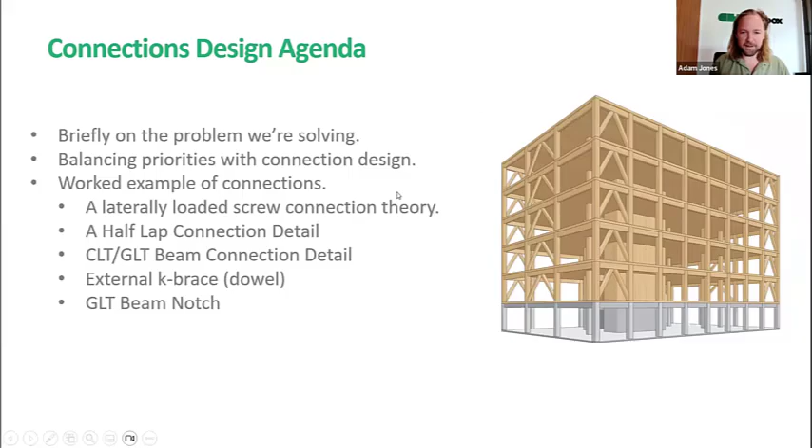So on the agenda, we're going to talk a little bit about the brief problem that we're trying to solve as an organisation, a timber engineering software company. We're going to look at the balancing of priorities when it comes to connection design, and then a worked example of specific connection details. So firstly, what are the problems that we're trying to solve at CLT Toolbox?

So when you look at status quo buildings like concrete buildings, there's a few things about it. One of them is it's easy to do, although it's sometimes less desirable. But when it comes to timber buildings, we notice that there's not as much education in undergraduate curriculums relative to concrete. There's a lot of building engineering spreadsheets and also maintaining spreadsheets. And there's a lot of going through PDF design guides and maintaining a lot of grades from the member design supply chain, but also the connections design supply chain, and also how those products interact with each other.

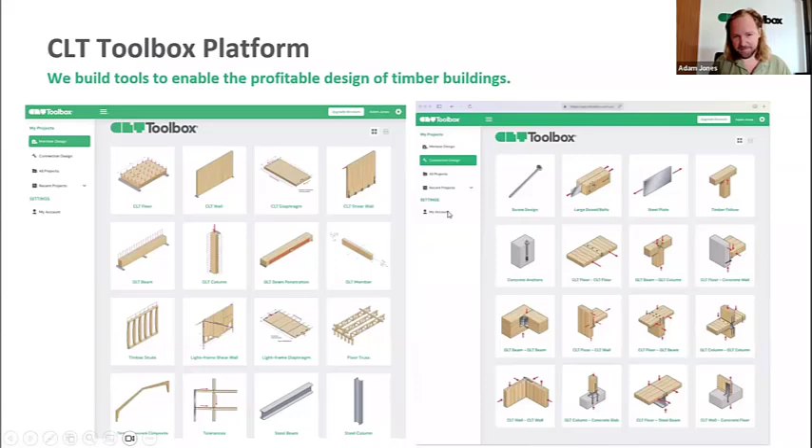So what we're looking to do is build tools to essentially make this pathway as easy as possible. And in doing so, if you make it easy for engineers, then hopefully we can support in growing the pie of timber, particularly going into new areas. So our platform, we build tools to enable profitable design of timber buildings. So anything that was previously a lot of time investment, we're hoping to make it easier and in essence, make it work. So we've got a team around the world, as Boris mentioned. We're a bit of an eclectic bunch, but we're all pretty all in on what we're doing as a team together in building this software.

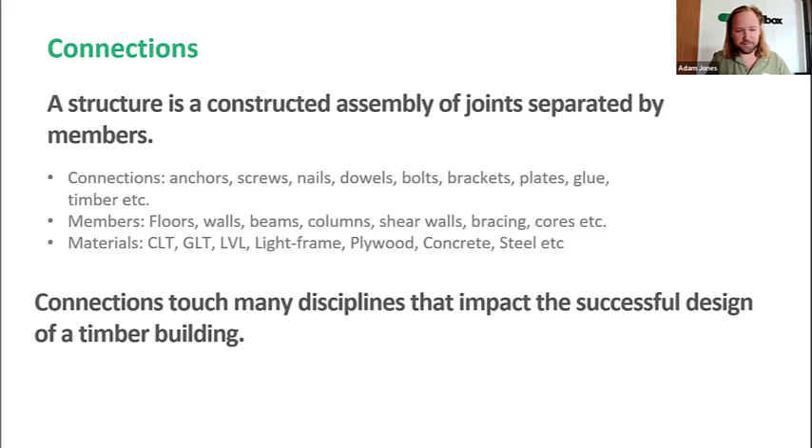The second point is connections touch many disciplines that impact the successful design of a connection for a building. So what are the things that we need to consider when designing connections successfully, not just looking at the structural design? So we're going to cover a range of multidisciplinary topics here. And the first one accounts for design for manufacture and assembly. So a bit of a plug for another Wood Solutions webinar, which is presented by Nathan Benbow, and it's Getting DFMA Right. It's an excellent webinar, but the point is, for the same connection detail for a beam column connection,

for example, there is a huge variation when it comes to CNC machining costs, because from a member supplier point of view, the CNC machine can be the bottleneck. And if you're looking at throughput at a factory, it might be, say, 100 meters cubed if there's no bottlenecks, or it might be 200, or it might be 50 meters cubed if there is bottlenecks. So that cost needs to get passed on in some way or another, and usually it's held up by the project. So with timber, we can always go as complex as we want, but we need to consciously, I guess, engineer in the complexity and know when we're doing that and adding costs.

So if this is a limiting factor of cost, how can we design with the design for manufacture in mind? And you can see some of the details, the real simple seated bearing connection, which they highlighted as basically the simplest to draw on paper, but also from a cost point of view. The second point is design for assembly.

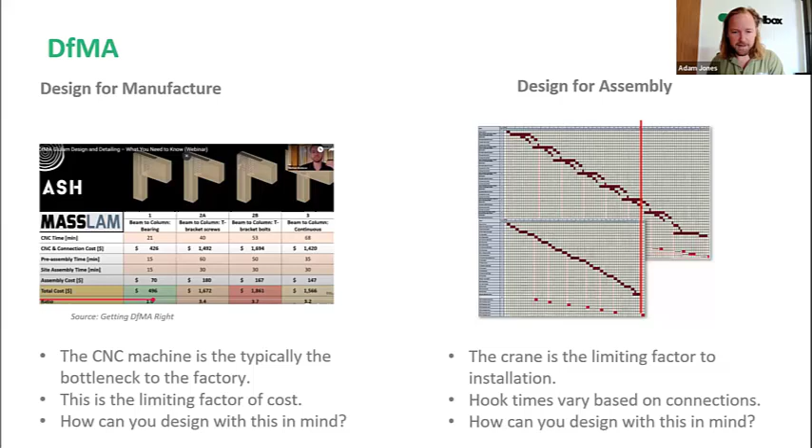So you think about if the crane is the limiting factor to our installation speeds, which enables that speed, the hook times can vary based on connections. So how can you design a really quick to install connection just to keep the crane going on to the next one? You've also got structural design.

So think about tolerances. You might have the moisture within the timber that's delivered on site. You might have rain events, things like that, to actually have swelling or shrinkage when it's in service. You might have elastic deformation, which is different parallel or perpendicular to grain. You might have deflection of the transfer structure. You got all of that happening within the timber structure.

And if you're designing with connection details that might go to a concrete core or something like that, the differences in tolerances have a big impact on the overall connections, and also, I guess, the structural safety in service. We've also got durability. Are they designed properly for external weather conditions, or are they just internal connections?

And of course, robustness. So that sometimes in a basic looking design of a building might actually govern a lot of the design to enable robustness. So what happens if you knock out one of these columns, and how does everything connect together so you don't have disproportionate collapse? You've also got different materials behave differently.

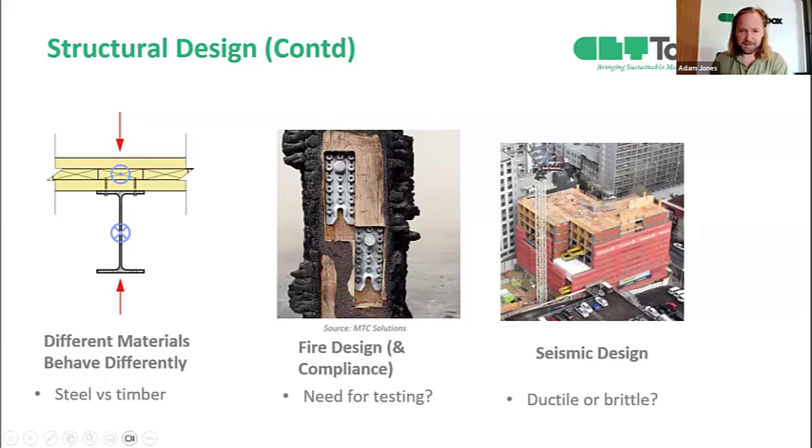Of course, you've got seismic design. Timber elements are brittle. The steel elements are ductile. So getting a ductile connection is a big part of it. And looking further at compliance, there's also different design methods. So this is looking at structural engineering, and I will cover in a bit more detail in my worked examples throughout the webinar. But for example, you might have AS 1720, which is well recognized in the building code. So you might get a tick there from a compliance point of view.

But the other design methods might be more sophisticated and accurate, particularly when it comes to mass timber buildings. So for example, current Eurocode is the most mature design code globally when it comes to timber design, and it's the most used globally as well, with the most runs on the board. But then you've got the new Eurocode, which is the cutting edge version of the Eurocode. It's been less used, and it's in the final draft stages. So, should you actually be using that if it's covering gaps in the current Eurocode?

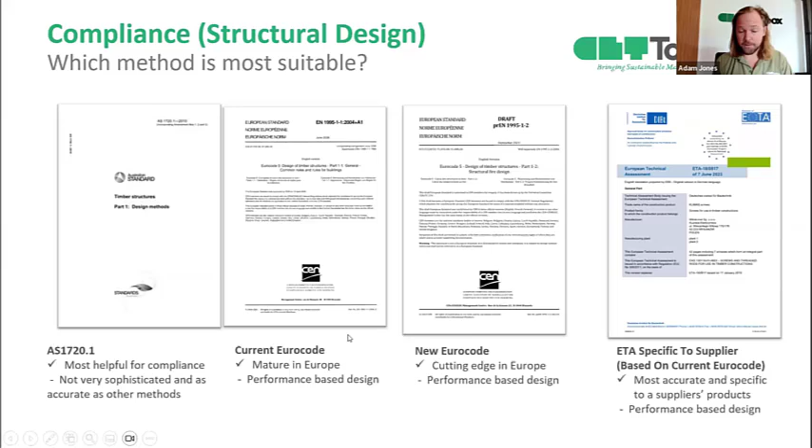And then you've got European Technical Assessments, which is a design approach which is very specific to the supplier's testing of their product. So you could argue that that's the most accurate way to design. But obviously, the final three are going to be performance-based design from the outset when it comes to mass timber.

You've also got to think about keeping the supply chain options open, or understand the trade-offs for this. So if you choose, for example, one supplier up front, you're going to have one set of sizes, one set of grades and densities of the timber. And when you choose the screw supplier as well, in this instance, say for a spline joint here, you might design specifically to their ETA, which might be specific on a density, for example. But what happens if you change your properties?

So XLAM, they've got the equivalent of MGP6 or their XLG2 in the middle, which is different to NeXTimber by Timberlink, they've got MGP10s, which is different to Red Stag. So they're all using pine. But then if you go to a European supplier using spruce, which has an entirely different density and different properties based on the species of timber.

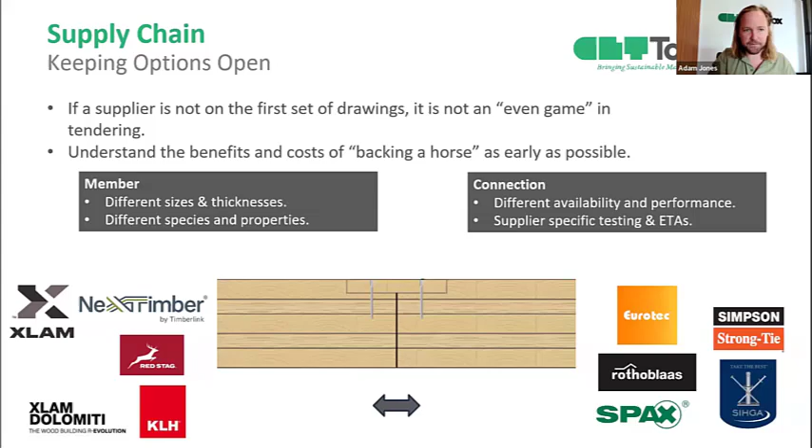So what happens then compared to the screw suppliers? What happens if you change your supplier, or if a screw supplier, for example, runs out of capacity and needs to air freight it or something like that? So again, you don't need to know everything back to front, but it's understanding the benefits and costs of backing a horse as early as possible.

So there's a lot going on with connections. It's more complex than probably any one individual can cover. There are people, of course, who go well beyond me when it comes to verticals within connections. But from my perspective, there's two principles that are always relevant when it comes to timber design. And what it's closely related to is understanding where we are when it comes to costs.

So old technologies like concrete, they're at the very mature end of the S curve, and they're fully at the end. There's no real innovation that can actually save on cost there, well, in a relative sense. But when it comes to timber, we are on this S curve, in new mid-rise and taller building contexts.

There is a big variation, and if you think about it, we know sustainability is baked in, we know biophilia is baked in, but the cost is the big question mark, and that's why, from my perspective, it's the holy grail. If you can get the costs down, get rid of a green premium, which is very possible, then you could get the triple bottom line, and then it's a no-brainer for projects.

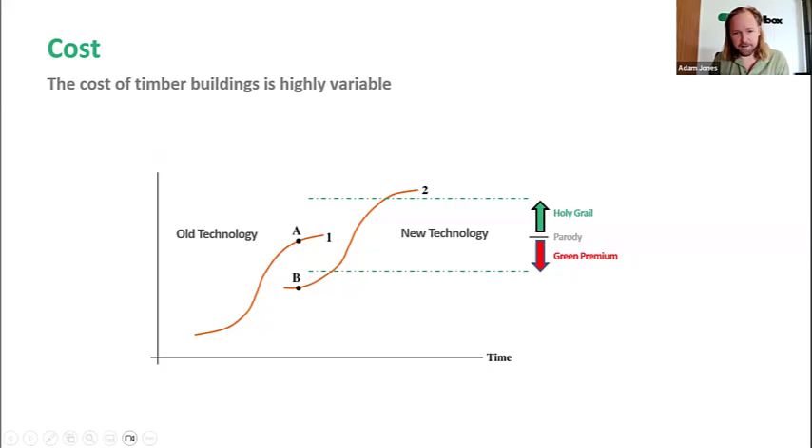So one principle is solve it once, use it many times. Because this is so complex, think of two paths to a design. One: if you've got 100 hours of consultancy, you could spend that on one connection detail and scale it out 50 times and actually solve a lot of the things that I've mentioned before. That's one way of doing it. It's using leverage to its max.

The other path is 100 consultancy hours across 50 connections, used 50 times. So obviously the second path will be more complex, and you're actually not going to be able to solve some of the multidisciplinary issues. So like always, it's complex enough as it is, so keeping it simple is always advised.

The second principle, and again, this could probably be applied to any sort of design, is solving for the bottleneck. As an engineer, we might think that the bottleneck is all about our structural design calculations, but it's a bit like this little cartoon here. Imagine someone on the Titanic saying, "Deck chair arrangement working group, are you ready?" And everyone's arranging deck chairs. This is just an analogy to say that sometimes the big picture is outside your immediate view. And that is the case when it comes to structural design.

So you can spend a lot of time building a spreadsheet for the new Eurocode, but there could be a bigger picture where you could solve it really quickly by just speaking to the supply chain up front about which connections best match their manufacturing capabilities and fire test data. Like I showed you before, if you spoke to someone like that, you can get their expertise up front, but again, knowing the trade-offs as well. Also asking the installer, which will enable speed. All right, so that's a bit of the high level, I guess the Titanic version.

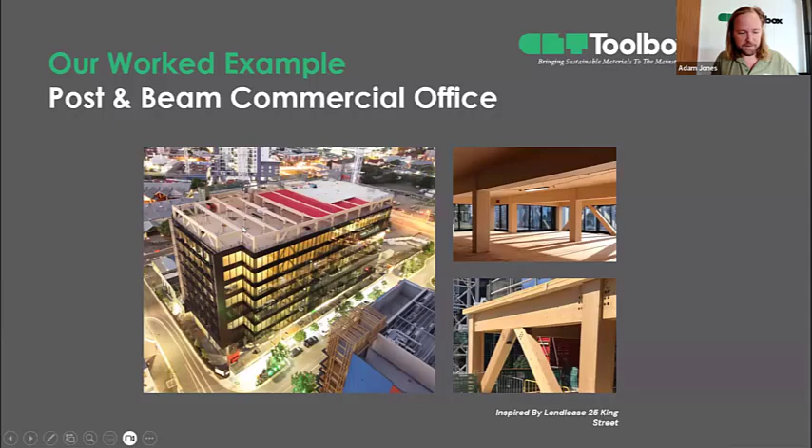Now we're going to start focusing on the structural design and connections. The worked example we're looking at is inspired by the Lendlease 25 King Street. It's a beautiful post and beam commercial office building. You've got your glazing on the outside with exposed facades. You've got primary, simply supported glulam beams with a 12-meter secondary span for CLT, where everything fits really nicely on a truck and is designed from a DFMA point of view.

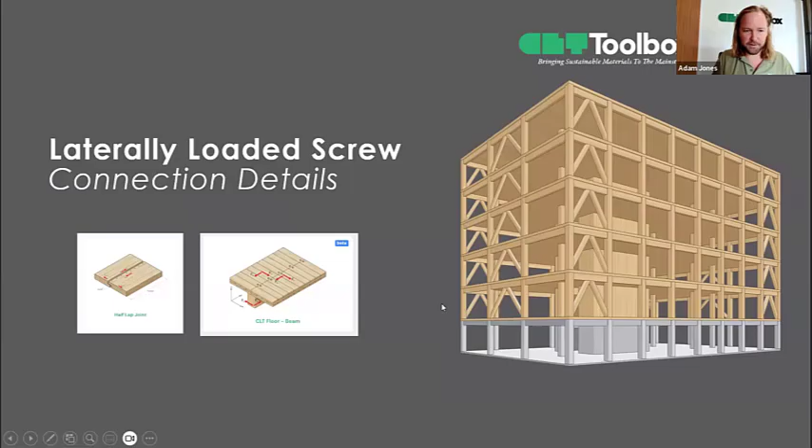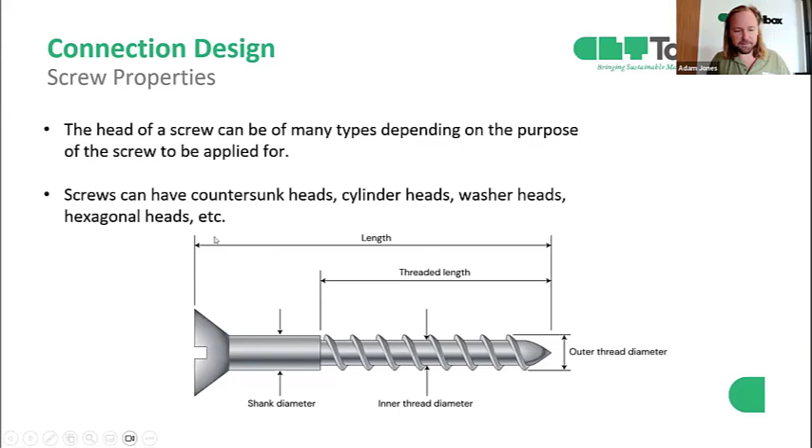So for the first worked example, we're going to look at two connection details, hopefully covering a bit of the theory, which I'm about to go through now as well. Let's call it a half lap and also a CLT floor to glulam beam connection. So firstly, from a screw property point of view, this is what you're looking at with a screw. You've got the length, the thread length, the outer thread diameter, inner thread diameter, and the shank diameter. And all of these have different variations of heads, threads, and so forth.

So when it comes to screw design, what's covered in Eurocode is the most advanced method. It's Johansen's theory to actually determine the lateral load capacity of the fastener. And the failure can be embedment failure within the timber or yielding failure of the fastener.

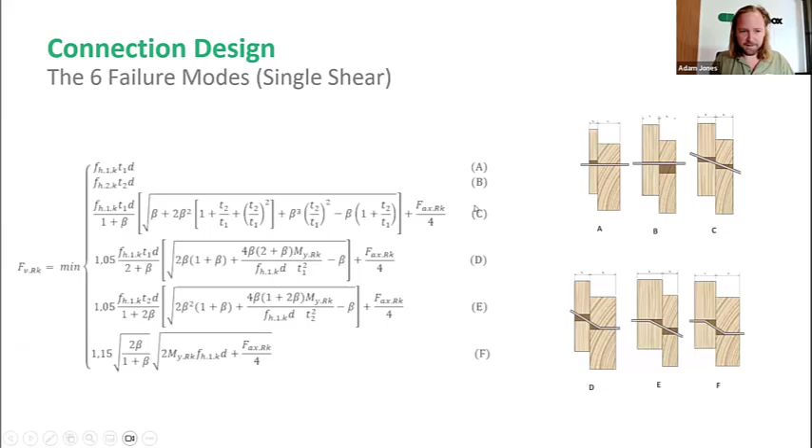So bringing that together, there are 6 different failure modes based on Johansen theory right here, and this is assuming single shear, as you can see here, and the modes A, B, C, D, E, and F. So to understand a little bit deeper.

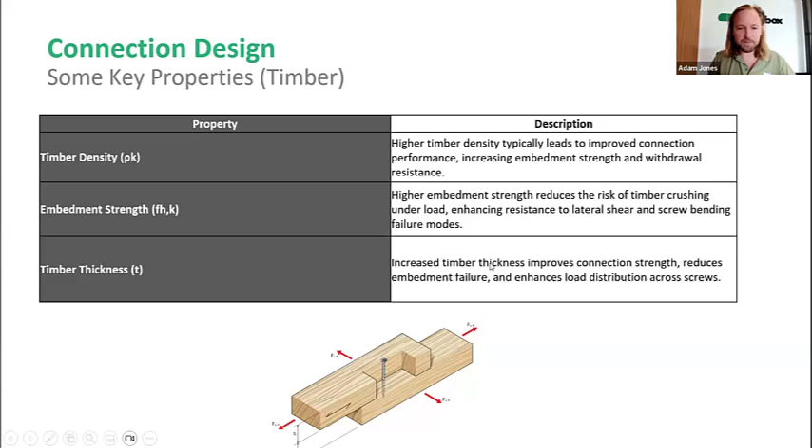So as you make it thicker or thinner, there's more capacity on the timber side, and then obviously with more capacity there, it's more likely to fail on the fastener side. Within the fastener, you've got withdrawal capacity, which is as if you're pulling the screw out. You've got the head pull-through capacity, so that's with the head itself pulling through the timber. The tensile strength, and then the yield bending moment, so as if it's bending.

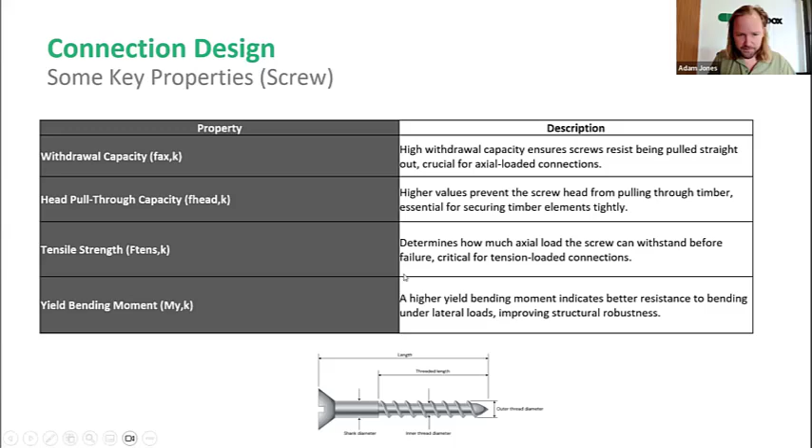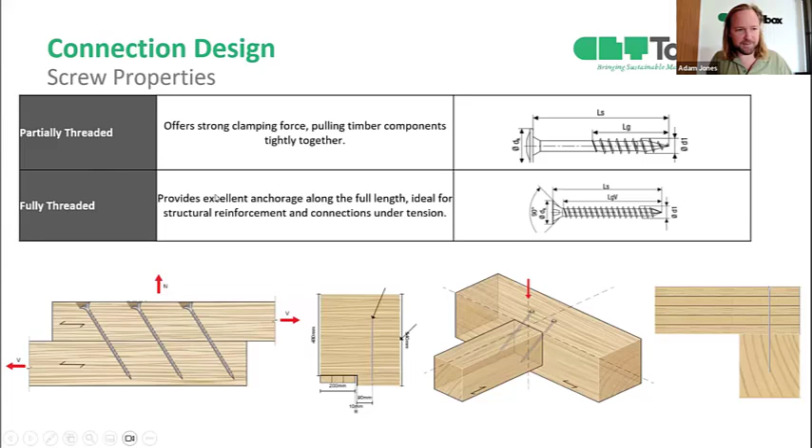Within the connection design, you've got partially threaded screws and fully threaded. So partially threaded offers stronger clamping force, so pulling timber components together, usually in a tension or reinforcement connection. Sorry, other way around. You've got partially threaded clamping together, and fully threaded providing the reinforcement or connections under tension.

If you look further into connections, a laterally loaded screw loaded in shear acts quite different than if you actually have an inclined screw. So an inclined screw will have more of an axial effect, and you're actually using the threads to create the connection strength as well. So that's an option we'll go into in our connection detail design examples, where you could use an angled screw to actually use the threads in withdrawal.

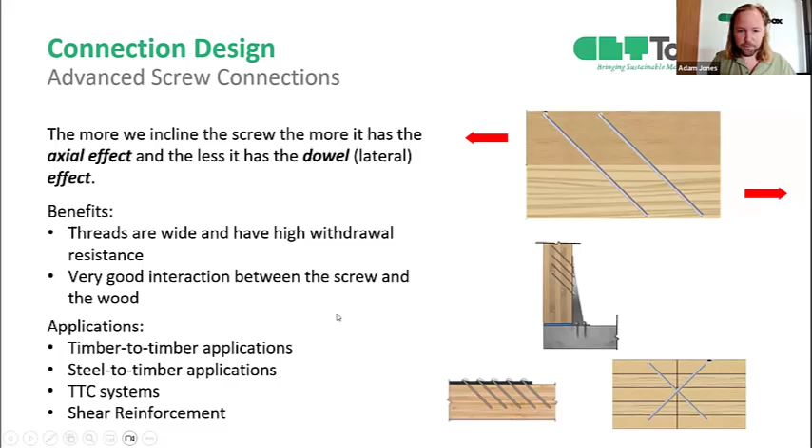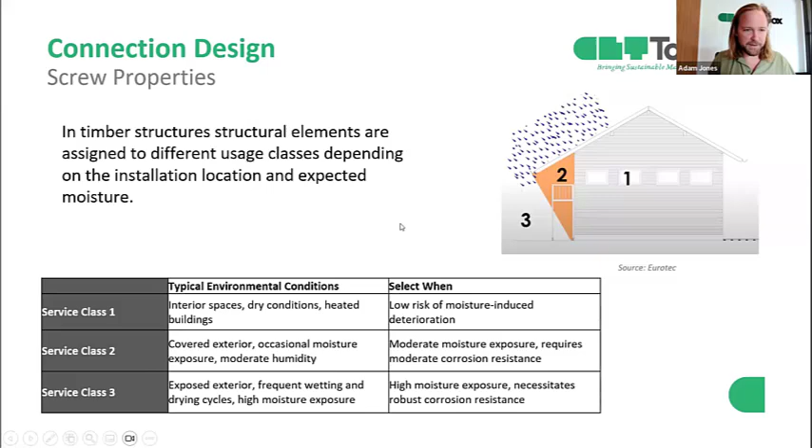Next, we'll go through screw properties. We're going to think about the service classes and the conditions. So service class 1 is a dry environment, service class 2, covered exterior with occasional moisture exposure, or service class 3 with exposed exterior, and the new Eurocode opening up service class 4 as well. So that's a little bit about the theory.

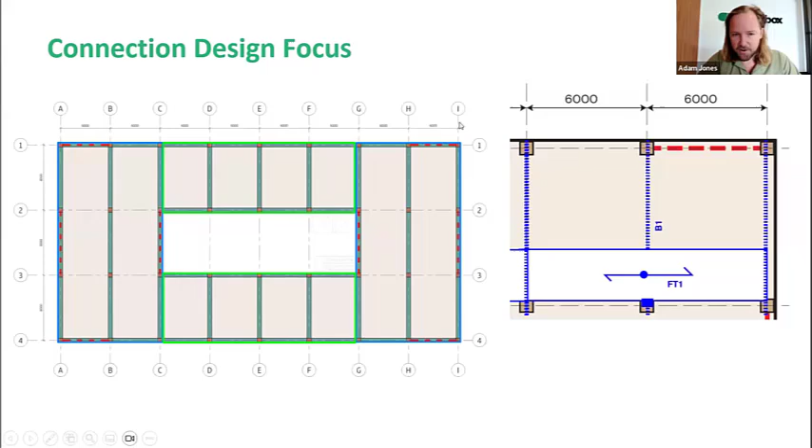So next we're going to focus in on a connection design. So for our building, you can see here a standard commercial post and beam office building. We're going to be looking at grids G, H, and I to design some of our connection details in this location. So if we're thinking about the design of a floor-to-floor connection, the first thing we need to do is to work out what the forces are within the connection.

So the way we can do this is we can get the factored loads from AS 1170, take that into a CLT toolbox calculator, which we're not covering today, which is a rectangular diaphragm design. You can have multiple panels adjacent to each other to work out the developed forces, and then you can take it into the floor-to-floor connection detail.

So when choosing a floor-to-floor connection detail, there's a few things to think about. So you've got a few options. So a half lap. This is an example with good lateral transfer with interlocking panels. You might have less fasteners relative to the spline, but it does have extra machining because you do need to route out a portion of the panel each time. And the other one is fire might be more compromising for a thin panel because of the joints. If you think about an exposed fire underneath, it might compromise the joint prematurely relative to the spline.

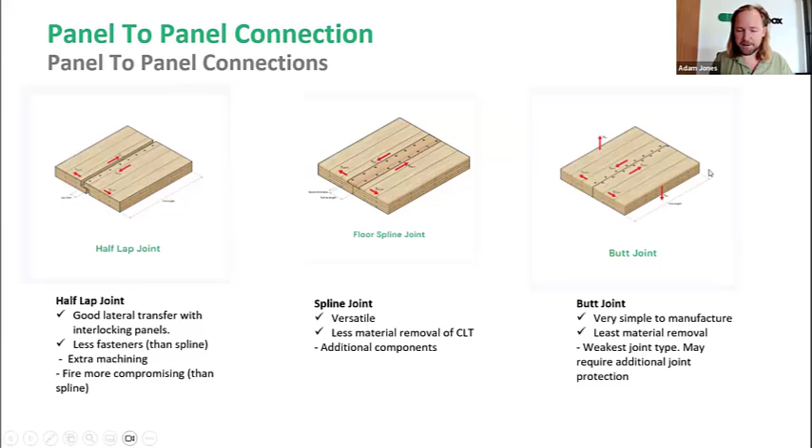The spline joint is very versatile. There's less material removal, but there are additional components. And then you've got a butt joint, which is the least machining from a manufacturing point of view. Very simple, you basically butt the joints up together, but it's the weakest joint type and might require additional protection.

So that said, we're going to now design our connection detail using, say, the proHolz Volume 2 to work out the joint forces. And we've got 11.39 kilonewtons in our floor-to-floor connection. All right, so this is CLT Toolbox. That's our company, and that's what we're going to be doing the connection details with.

Thanks for sticking with us through all of that.

So basically what I went through there is I've been just updating the screw based on the Timberlink screw and all the Rothoblaas. So I went through the different screw families, chose the right screw, and then went through the calculations here from a geometry check as well.

So that's incredibly embarrassing that I wasn't checking the right screen there in the app.

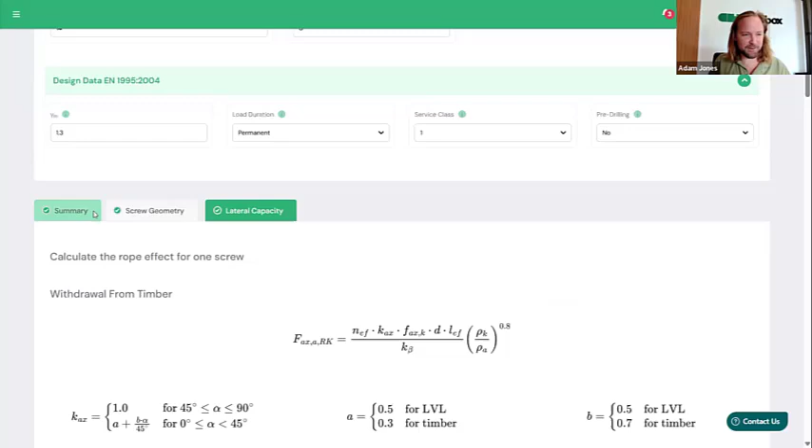So at the very end, we've got the shear capacity, and I'll do a new connection detail in a second, which should be able to help in that sense. So right now I'm changing the spacing and we've got this connection detail to work, but I will do a different connection detail which will catch everyone up.

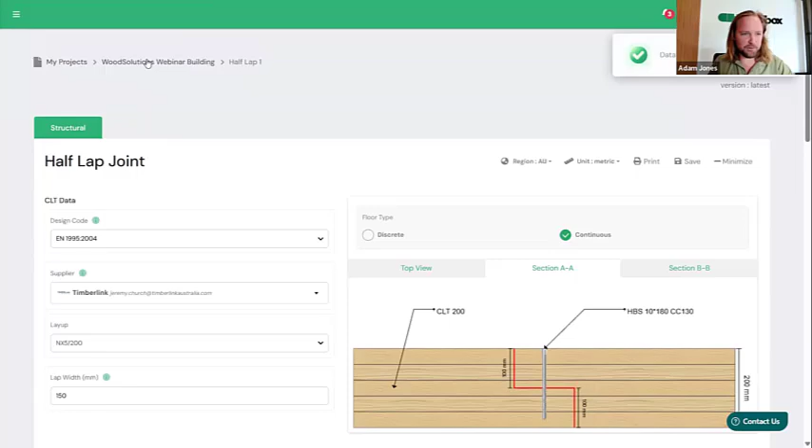All right, so in the app, going back here, we do have member design and connection design. So the second connection detail we were going to look at is a CLT floor to glulam beam connection. You click on your calculator and then you can add it to the scope of a certain project that you're working on. So for us, we're choosing a Wood Solutions webinar building.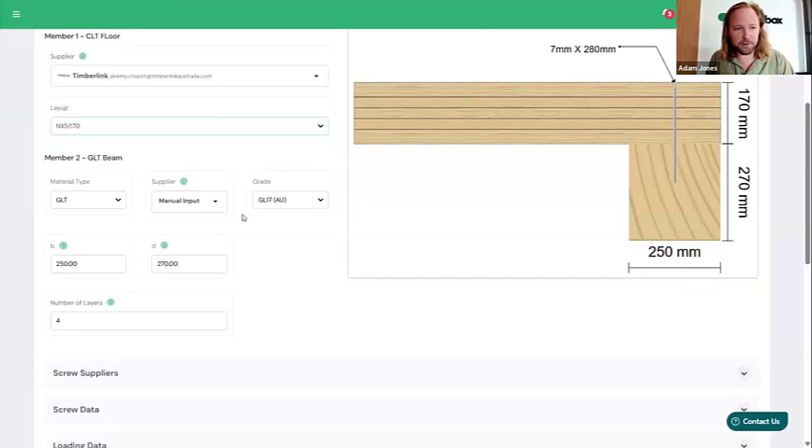So the first thing we'll do is choose our CLT floor layout. You can always do manual input or choose your CLT floor, and you can see this working dynamically to build up your CLT. Secondly, your glulam supplier. In this instance, we can choose, say, Ash, and when you choose Ash, you've got all the grades that they supply, but also the sizes and the properties. So if we chose an Ash beam, say a big beam like that, you can see it working dynamically as well. So that'll be reading the different properties from the CLT and also the glulam supply chain.

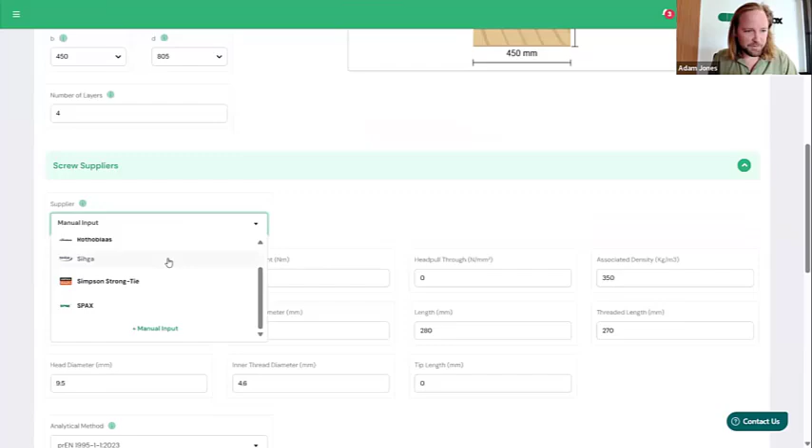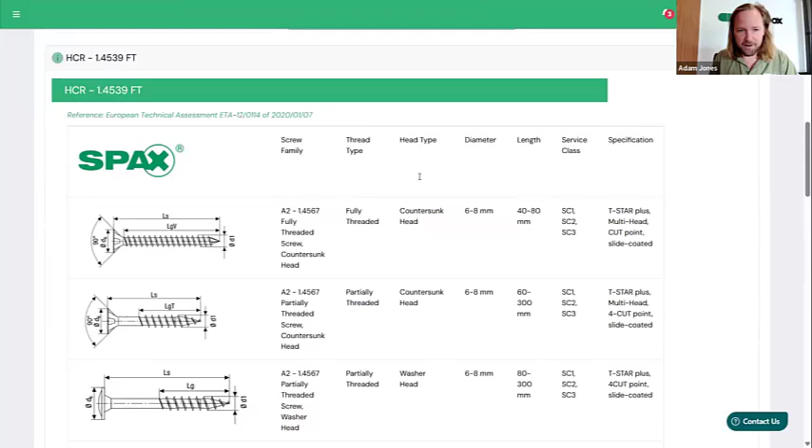The third is the screw supply chain. So a little bit like before, which nobody unfortunately was watching. You choose the screw supplier, and with that you can go through the screw families and work out the thread type, the head type, the diameter and lengths and the service class based on the screws. And as you change the screw supplier, you also get the differences within each one. So you can really quickly understand what's available within the screw supply chain as well.

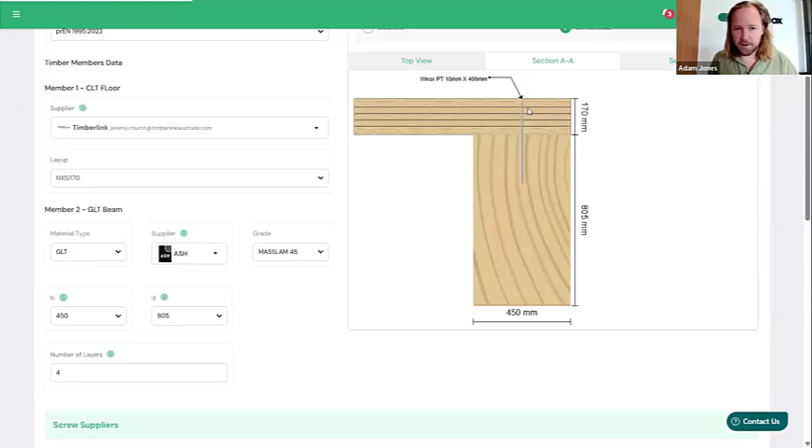So just to spread some of the love, we'll go with the SPAX screw, partially threaded screw, and then choose our screw. So if we say a 10 mil by 400, you can see our connection detail right now populating. You can choose the spacings of the screw. So let's just say it's a 150 mil spacing, and then this will update the spacings of actually how our connection detail's working.

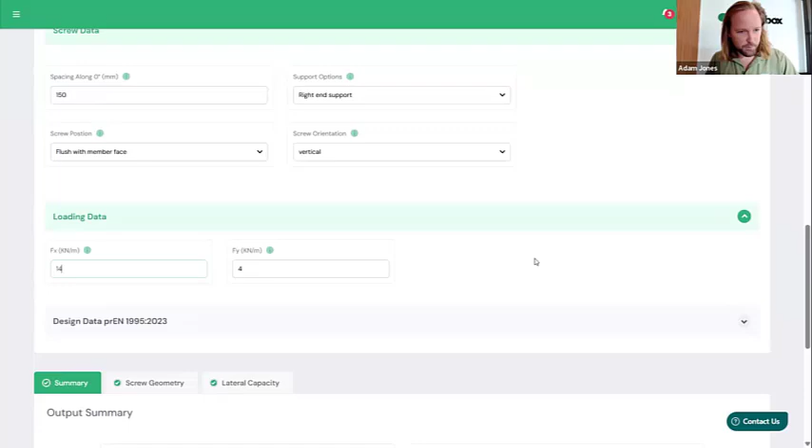And finally, you've got your forces. So if we chose, I think we had 14 kilonewtons, and then input the forces, and then you got the load data as well. So if you're moving through, you can look at the calculations here. So firstly, geometry checks as well. You can see here, one of our geometries isn't working relative to the diameter of the screw. So we can go back and update that.

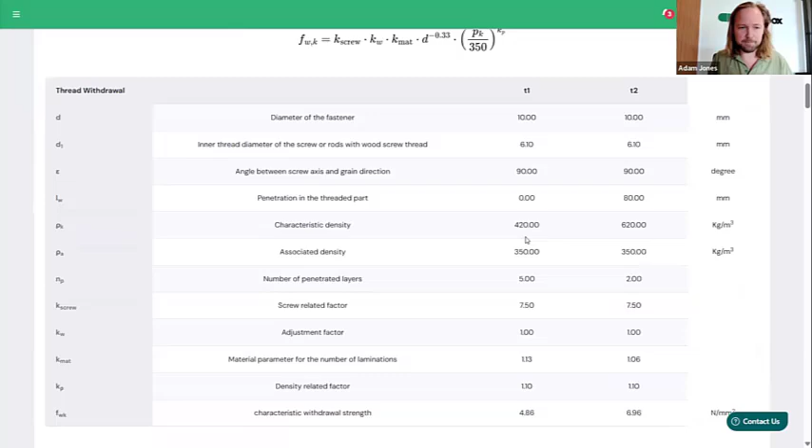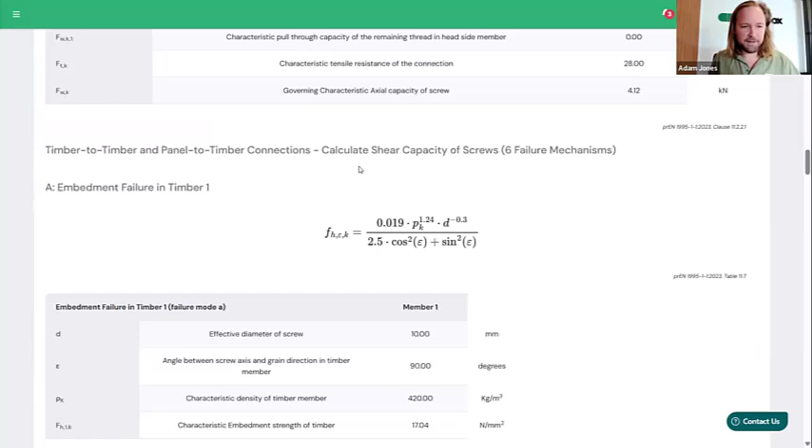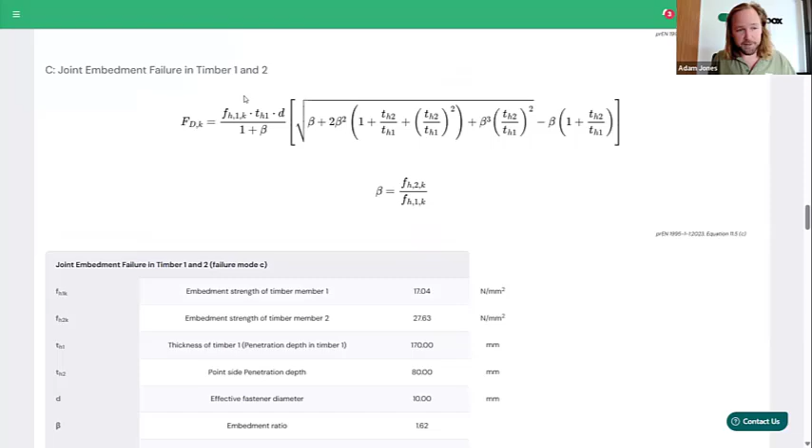And secondly, we've got the axial capacity of the screw. So I was going through the theory earlier, but you've got the withdrawal of the timber, checks of the head pull-through capacity, tensile capacity of the screw, and then the actual capacity of the screw based on the minimum of the 3 above. And then following that, you go into the 6 failure modes of Johansen, the Johansen model. So embedment failure of the timber 1, embedment failure of the timber 2, joint embedment failure in timber 1 and 2, so the CLT and glulam below, and then the screw failure modes as well.

So based on that, you can run through and see all the different capacities here. So out of the 6 failure modes, in this instance, with the CLT floor, with the glulam beam underneath, and the screw that we've specified, the minimum lateral capacity that's governing is a double plastic failure in the screw at 5.5 kilonewtons per screw.

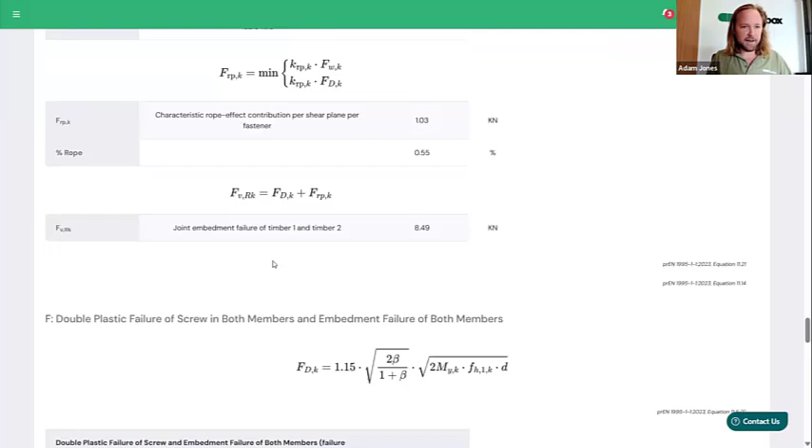So obviously you can change the screw and you could expect the screw capacity to change as well. And then you've got the total design capacity of the fastener as well, based on the spacing chosen. So that is how you design a connection detail of a glulam beam to CLT in CLT Toolbox.

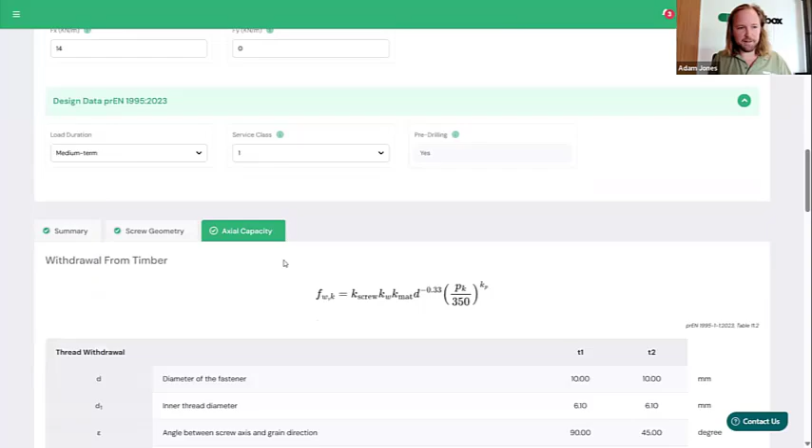So you can see here it's not a black box. And one of the things that you can always do is change the orientation to get the benefits of inclined screws, and then that'll start using the axial capacity of the screw. So you can see how that changed there from lateral capacity to the axial capacity to see how it's designed. So at the end of it, that's a section, and then you can save the calculation and go on to the next connection detail.

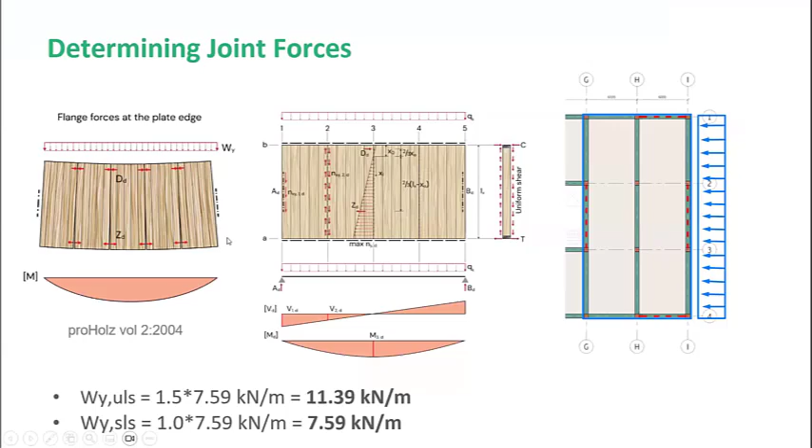So I hope, Boris, that you're now looking at my PowerPoint. Yes, I am. Good stuff, mate.

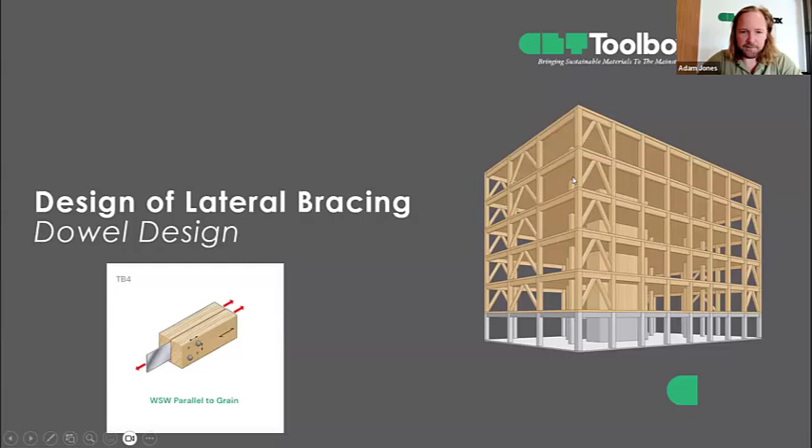All right, so we've done two connections here. We've done a slab to beam and a floor to floor connection. Next, we're going to look at the design of lateral bracing. So looking at a dowel design, for example, and you can see here the external K bracing. They're always a feature of the design. So how do we actually design these things?

So the first thing is connections may govern the member design. So as you do the analysis in an external platform, the next thing you can do is design the member, check for tension and compression, and then design the dowel itself, and just see what is the governing factor in this instance. So with us, you've got the load analysis as your first step. Work out the forces, usually closer to the ground floor, for the maximum tension and compression. So for our example, you can see here we've got a maximum compression force of 175 kilonewtons.

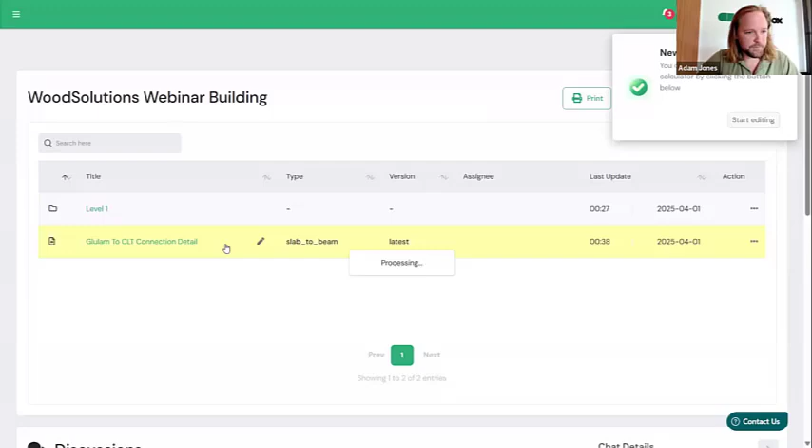So we can go back to our project page where we're doing our calculations for this example. Go to a member check, design the member, and open it up. So we always have these dynamic views, so you can see how the cross section's working from a force point of view. So for us, we're choosing a diagonal brace like that. I think it was 5650 millimeters.

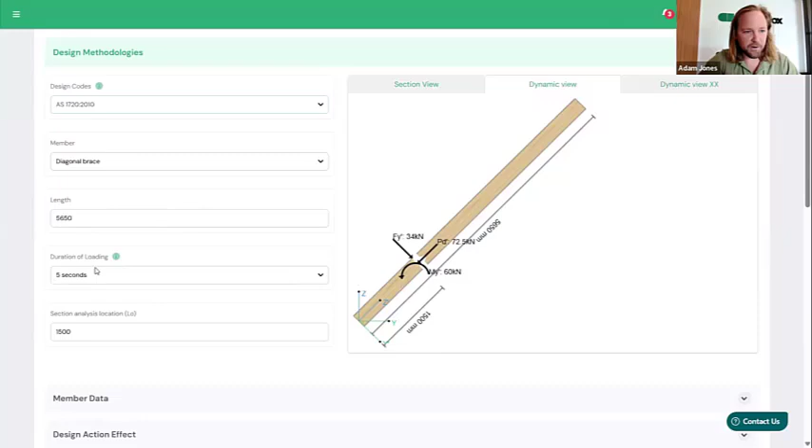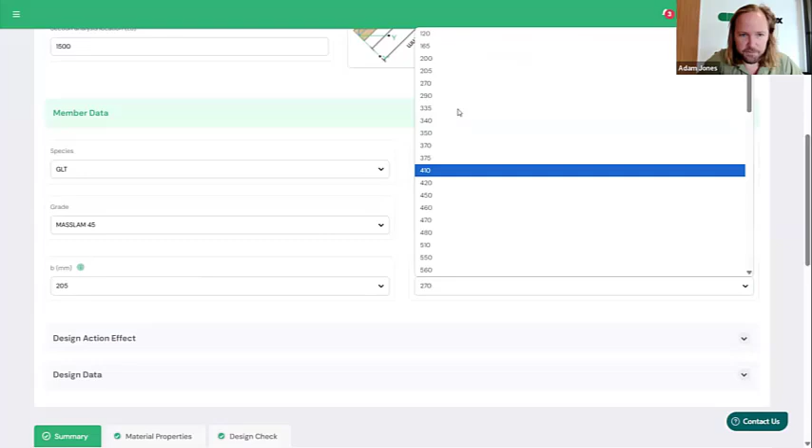And as you change between design codes, all of the design and duration of loading and everything like that will update. So for us, let's just say we're using AS 1720 for the design, and 5 seconds for, say, a wind loading. So choosing your GLT, and again, you can choose your supplier availability or manual input. So 205 by 205, something quite simple.

Next, you've got your design actions. So for the forces, because we're not focusing on member design today, it's just to prove the principle for completeness. As you turn off your bending moment and shear force, you'll just be left with the checks that are left over. So for us, at 170 kilonewton compression load, and you can see right now it's working. Similarly below, you can go through your design data and work out your K factors for your member design.

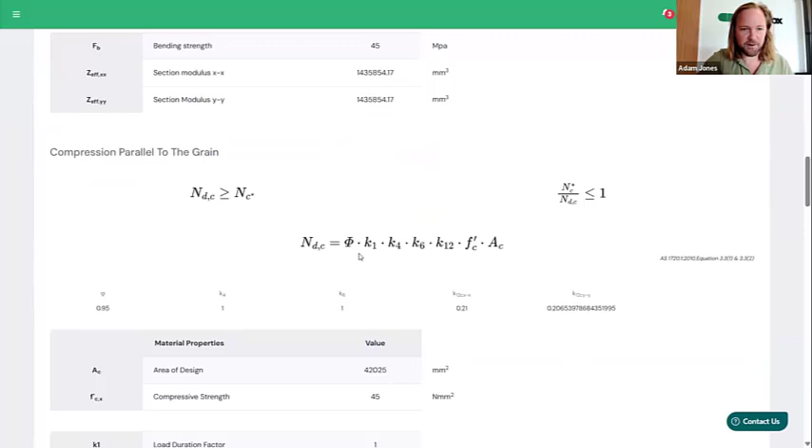So for us, we had a 205 by 205 member working, and next we're going to design a dowel. But for completeness we'll go through all the checks. So you can see in the design checks, you'll have your compression parallel to grain, your combined actions, detailed calculation of your stability factor based on it being a column. All right, so that's for the member part.

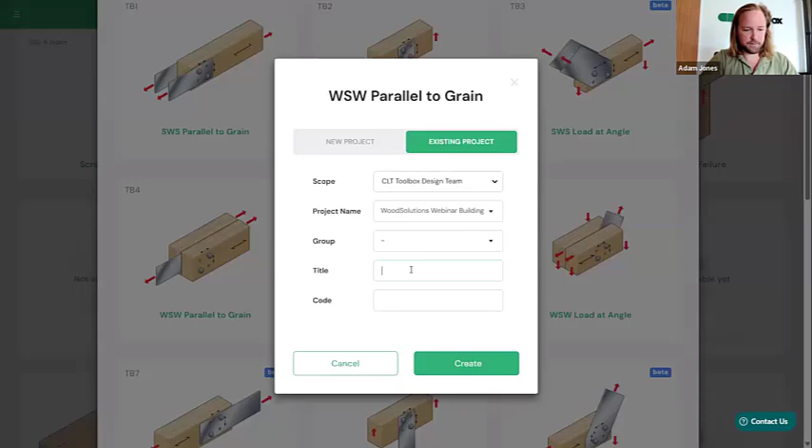Next, we're going to design a dowel for the same check. So if you go to connections, if you click on large dowels and bolts, you've got the ability for internal plates and external plates for your design, and single shear as well. So for us, we're doing wood-steel-wood to conceal the connection as best we can. Going to our project. Loading up our dowel design connection.

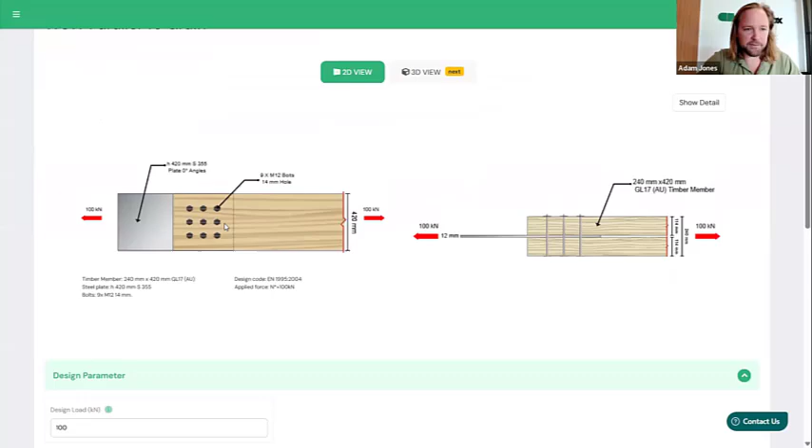So this again is one of the tricky parts from a structural design point of view, and you run into the same challenges as before. So you can see here you've got a cross section in both directions of the member that we're designing for. You can do a compression load with a negative, so it's in compression, which was 165 kilonewtons in compression for one direction of the bracing, or in tension as well. So you can configure the loads accordingly.

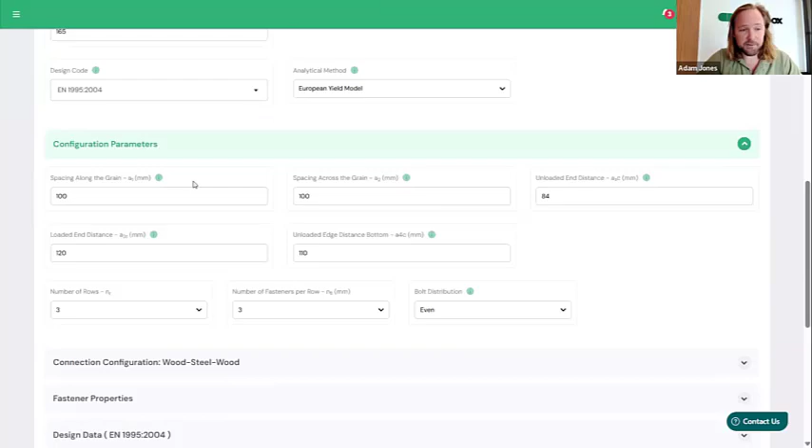For our design codes, you can see here Eurocode, new Eurocode, AS 1720, and the New Zealand design standard as well. You've got your spacing parameters. So as you input that, that can be the thing that actually governs the design. So if you go to N4, 4 rows, for example, you'll see below that our geometry checks aren't working. Next is choosing your middle steel plate. So the steel plate itself governing the design.

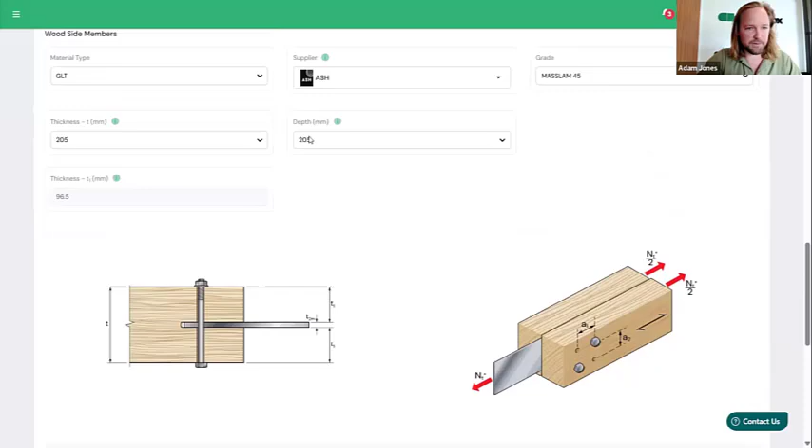And then again, the members itself. So if we go back to our ash member, we added 205 and 205. You'll see pretty quickly that it's actually all out of the page. So with this, you can actually go back to the actual design, try and configure it to get working appropriately to really consolidate the design. So I'm just going to make the depth here thick enough to fit both dowels in this instance.

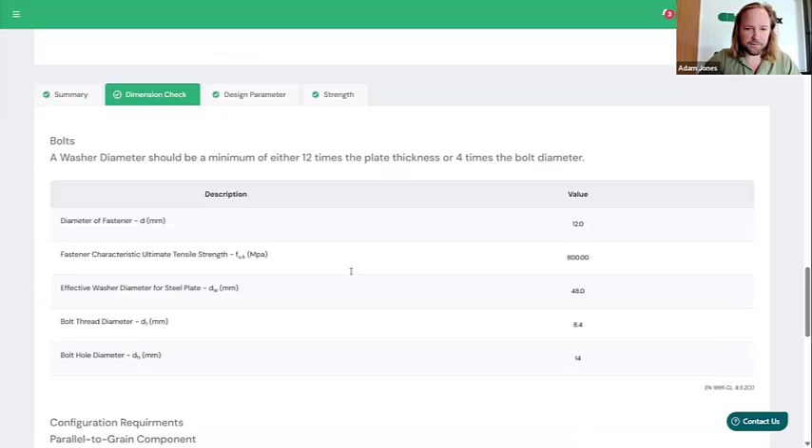Next, you got the fastener properties, so the bolt types and fastener grades, and then our design data as well. So if you go through here, you can run through all the checks again. So dimension checks based on the geometry. So we are working in this instance. So it's relative to the dowels and the steel plate and the timber and edge distances all come together. And then our design parameters, and then our strength design as well.

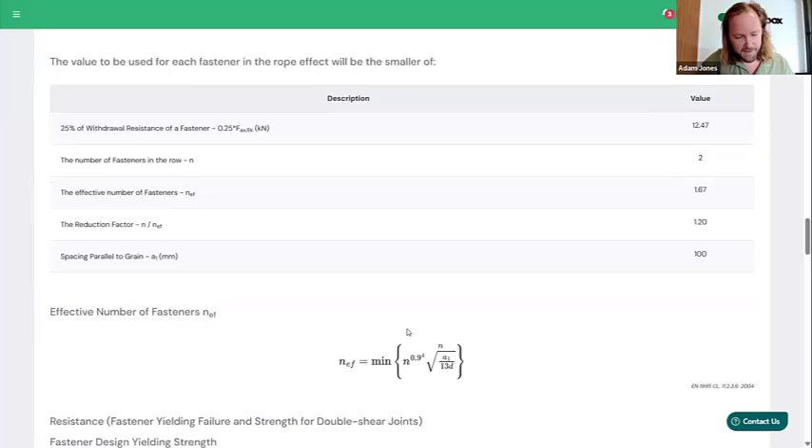So as you go through the different design methods, the actual laterally loaded dowel is working in a similar sense to the Johansen yield model with similar timber and steel properties that we covered at the start of this webinar. A few of the extra things, it does include brittle failure modes and things like that when you do the dowel design here. So that's the fourth connection detail that we've covered here.

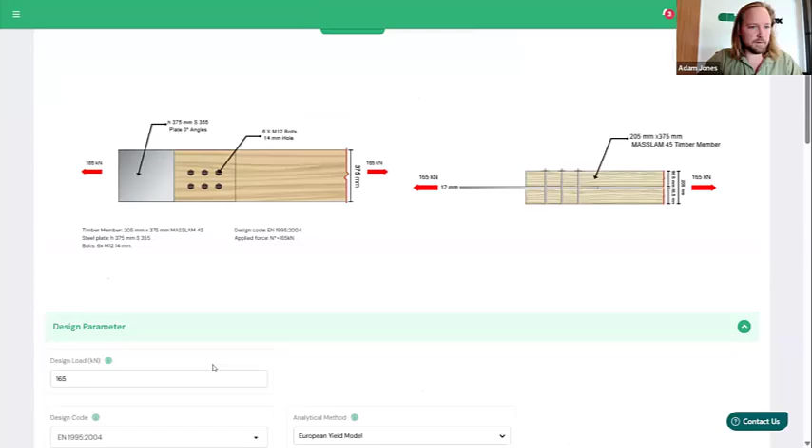You can configure it accordingly to get it 3x3 and improve the actual connection detail as best you can. So now we are governing in terms of our design based on the forces that have been inputted into the design. 165 kilonewtons was the force we inputted there. So we got our large dowel and bolt connection working, but you can see here the actual size of the timber member was governing connections instead of actually governing in the member itself. So the geometry checks is one of the things that might govern the design.

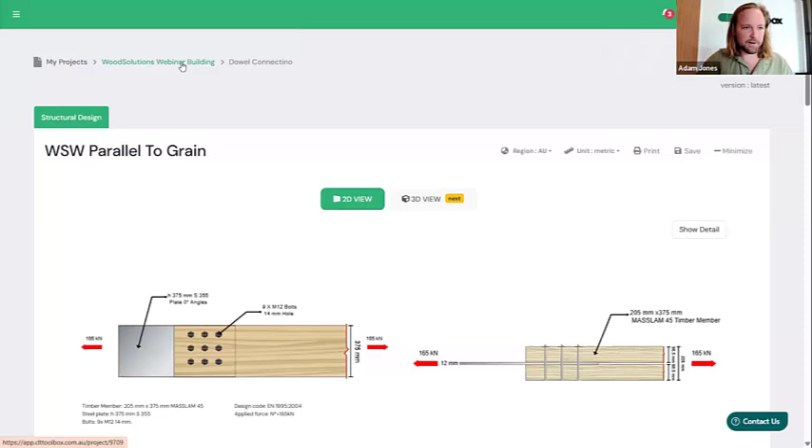So if we go back here, we might have time for one more connection detail. We've covered laterally loaded screw, but also an incline screw taking into account the axially loaded screw. Now we're going to look at a completely different connection detail, which is a reinforced beam notch. A lot of times in a design process, you might need a beam penetration or a deeper beam, which is unexpected in the detailed design phase. And you might need to find height in a different way, and sometimes a beam notch is one way of doing that.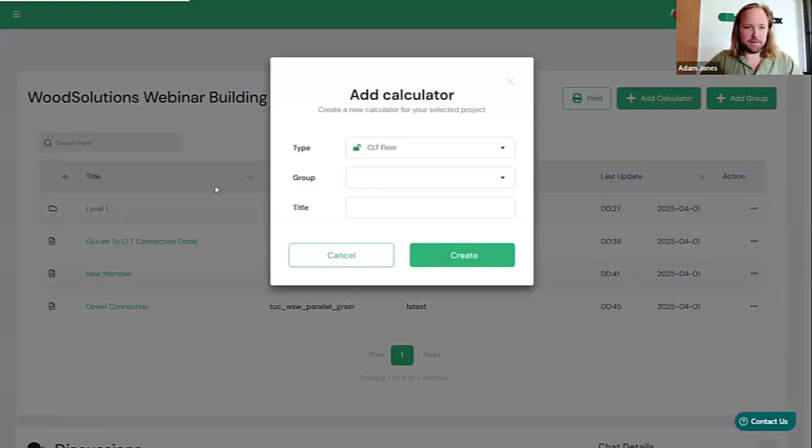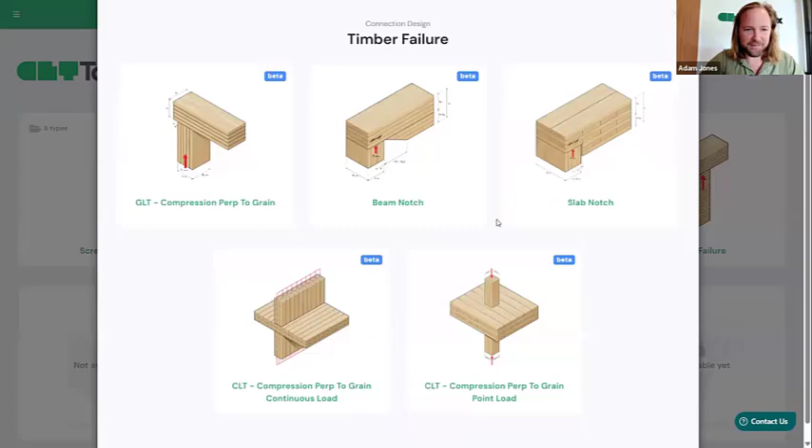All right, so if we go back to the app here, again, you can go into our calculators. All these calculators are meant to cover all the certain random scenarios that pop up when you're designing buildings. So in this instance, you can see our timber failure modes. We can go our beam notch, add it to our webinar, and then we can open up our beam notch check. We are doing a relatively fast version just to get a good coverage of different connection details.

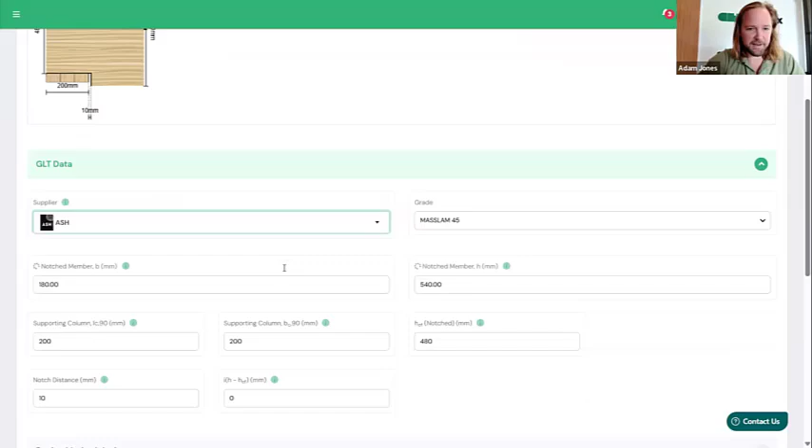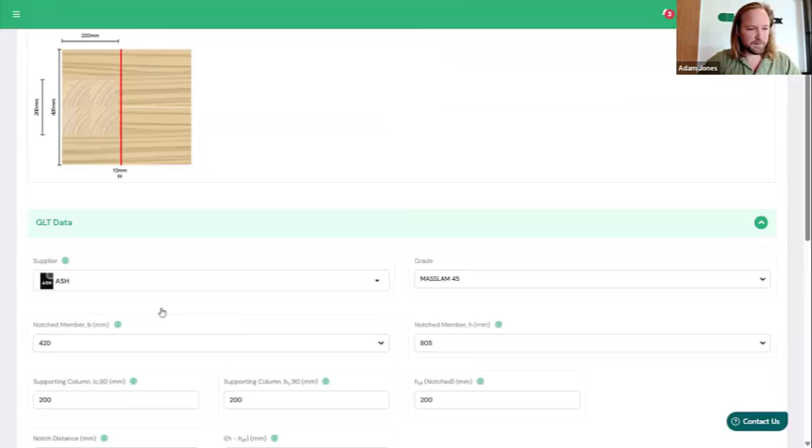What you're looking at here again is the dynamic view. You've got the column underneath, looking at from the bottom, then the section view of the column and the beam, and then the side view as well in the other direction. So if we chose, say, an ash beam, you can update the actual beam size here and how much it's notched in member. For a building of the type we're looking at, it might be a bigger section like that. Your supporting column, if you look at the bottom view, it's not really matching up. So let's say we've got a 450 by 450 column, so that's now matching up with the size of the member itself.

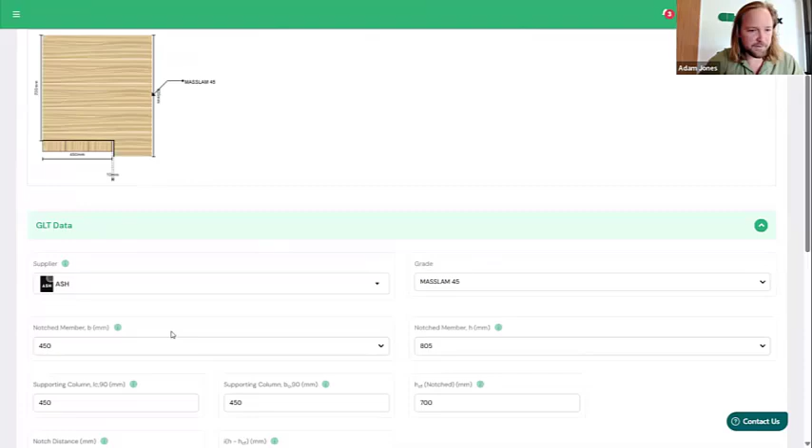And if you look at the section view, we can start actually designing the size of our notch. You can see the small notch here. So H effective is 700, so 105 millimeters there. And you can start designing the length of the notch here if there is a slanted notch connection like that. So that's actually just detailing the notch, and you can see it in all the different views to make sure we actually are covering what the notch looks like.

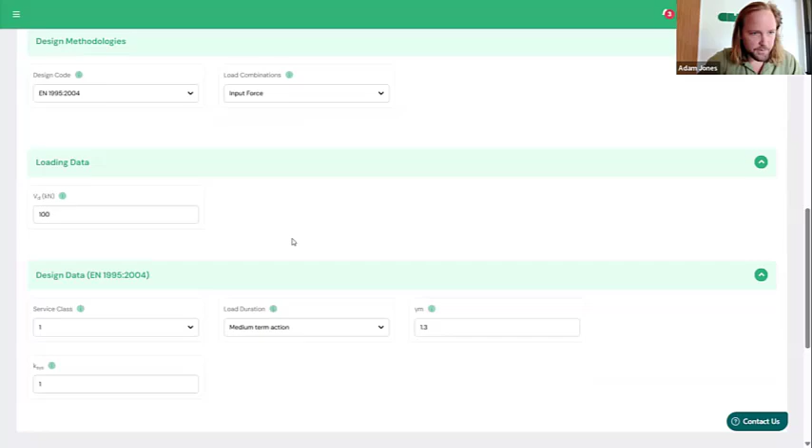The design methodologies again, so Eurocode in that instance. Input your forces based on the notch, and then you can see the check. So you can see we're failing here in shear stress. One of the options we can always do is add the ability for screw reinforcement. As you can see, it's only based on the new Eurocode, which actually enables this option.

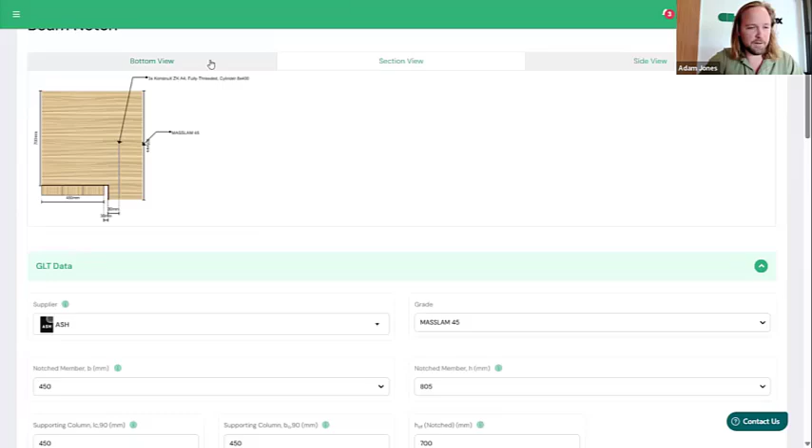So as you choose the screw reinforcement, a little bit like before, you can choose your screw supplier, there'll be a filtered version of just the fully threaded screws that might be applicable for your reinforcement, and the number of screws. So if you look back at our connection detail, you can see we've got 3 reinforcing screws at this notch in both directions, and we can then do the actual design in this instance.

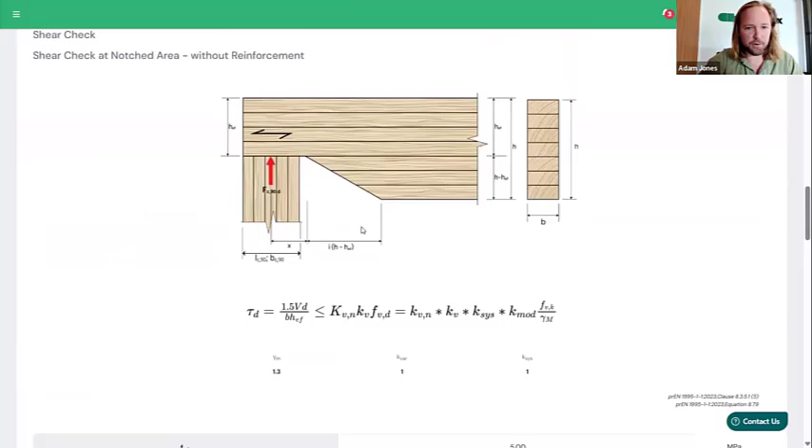So you can see right now we're working, albeit I put in the 100 kilonewtons, and you can actually optimize the design a little bit further. And always not being a black box, you can actually see in detail all the checks. So in here, it's the shear base check based on the new Eurocode, and you can hunt down the calculation routines, and it'll do the same if you're based on the current Eurocode geometry checks, and then the reinforcement design based on the actual capacity of the screw. So it's quite a detailed check.

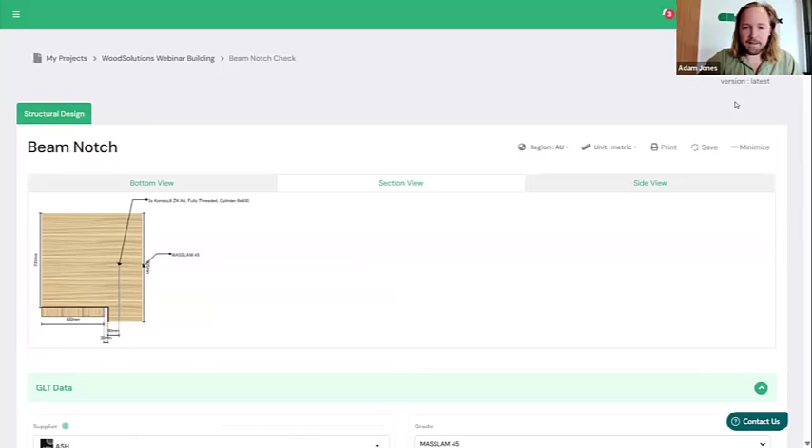And then at the very end, and we'll stop in a second to go for questions, what we always have is the ability to actually print our reports at the end. So this will take a few seconds to actually load up the report, but you can see the roadmap that we're following. Next is the ability to export and import based on bulk CSV files. So if you're using ETABS or something like that, you'll be able to do the design. So this will take about 15 seconds to load up properly. So whilst we're doing that, we're about to end the webinar anyway.

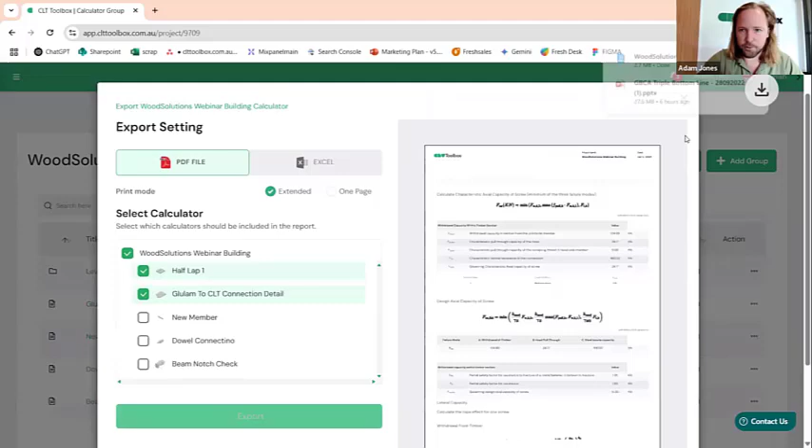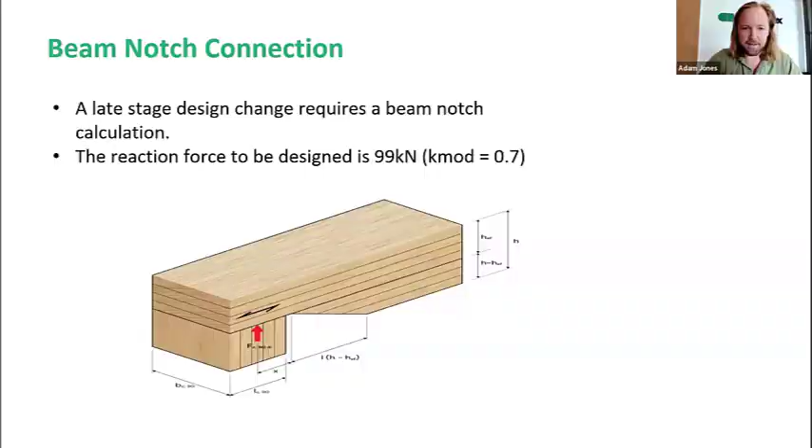Here we go. So there's the detail. You can see all the calculations of the PDF report that we've actually produced. And then you can, of course, export it. And then you've got a design report based on all the checks that we've done in this webinar so far. So that's about it. So what we covered today is a lot of theory on connections.

I don't know what you were looking at, everyone. Apologies about the start, but I think we recovered hopefully by the end, Boris. So appreciate everyone, and thank you for some questions. Yeah, no, look, thanks so much, Adam.

I think it was a really good overview in terms of, I suppose, the key takeouts is that when engineers are doing design in particular, it won't all be found in 1720 Part 1, and need to look at some others, like the Eurocode 5. But Adam, just from the work that you've done with engineers, I'll take the first question if you wouldn't mind. How do you work in terms of that certification perspective? If engineers are using Eurocode 5, how's that accepted here in Australia?

Yeah. So that's always going to be a performance-based design. So obviously it's outside of AS 1720 whenever you're using Eurocode. So that means being performance-based design, you're relying on engineering judgment. So it's up to the structural engineer to make the call on the most appropriate design method to actually design the building properly, because that is the intent of any design, to design buildings as safely and efficiently as possible. And sometimes that is just the best method. So it's performance-based design, and you need to get the performance-based design brief and everything like that as well.